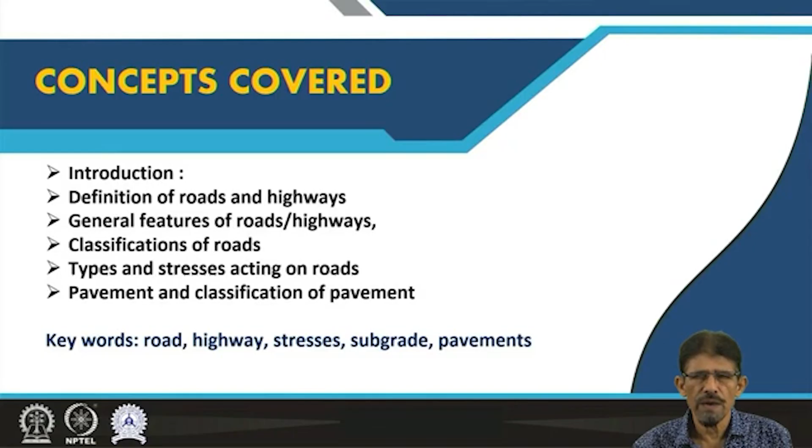In these lectures, we are going to discuss road and highway features, and pavement. We will cover introduction of roads and highways, definition of roads and highways, general features of road and highway, classification of road, pavement, and classification of pavement.

Friends, as you know, the road is a linear alignment utilized for movement of people, transportation of goods and animals. People have been familiar with movement from one point to another since the very beginning, and every country has a good road network. The road network is a symbol of prosperity and progress in civilization concerned to any country. In India also, we have a beautiful network of roads throughout the country.

Roads are very important for economic development because they facilitate transportation of goods, materials and others. Roads are also important for social and cultural exchange and other activities concerned to human progress and civilization.

As far as road is concerned, a road is a simple linear open system and a linear improved surface way to facilitate movement of traffic, vehicles, animals, and transportation of goods and material, etc. Basically, roads can be categorized into three categories: motorized road, non-motorized road, and pedestrian.

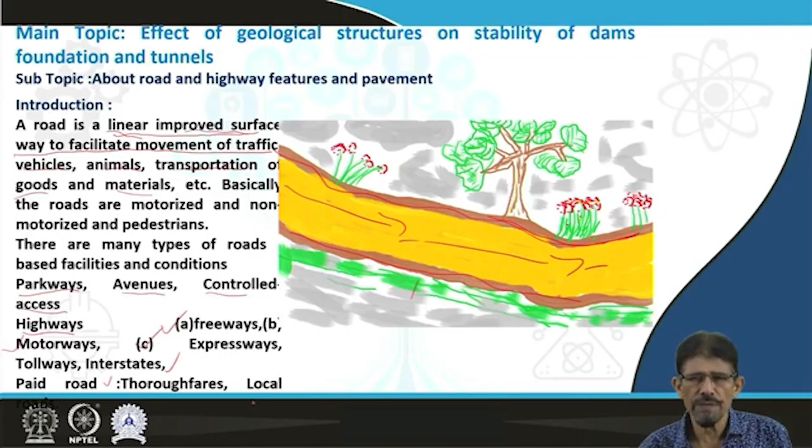As far as highways are concerned, a highway is a road connecting major cities, and the National Highway Authority of India looks after the maintenance, repair, and other aspects of such roads, while the Public Work Department (PWD) is responsible for construction. However, an advanced type of highway is the expressway, also called throughway, parkway, freeway, superhighway or motorway.

An expressway is a major arterial divided highway featuring two or more traffic lanes in each direction, with opposing traffic separated by median strips, elimination of grade crossings, control of entries and exits, and advanced design features.

If we differentiate between highway and expressway, the highway connects major cities and towns, usually having 4 lanes to deliver high speed traffic. But the expressway has limited access and comprises various features like access ramps, lane dividers, etc.

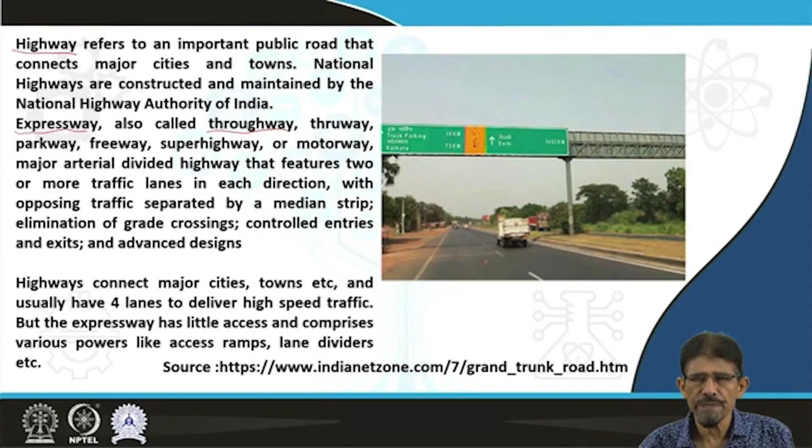You can see a good view of the Grand Trunk Road connecting a long distance from Calcutta to Peshawar, having many lanes and constructed using bitumen as well as concrete.

If we look at the specific definition of road, it may be defined as an alignment used for movement and transportation of materials, vehicles, people, animals, and transportation of goods and others.

As per the Organization for Economic Cooperation and Development, a road is defined as a line of communication or traveled way using a stabilized base, other than rail or airstrip, open to public traffic, primarily for the use of road motor vehicles running on their own wheels. This includes roads present on bridges, in tunnels, in underground cuttings, trenches, supporting structures, junctions, crossings and interchanges, and toll roads, but does not consider a cycle path.

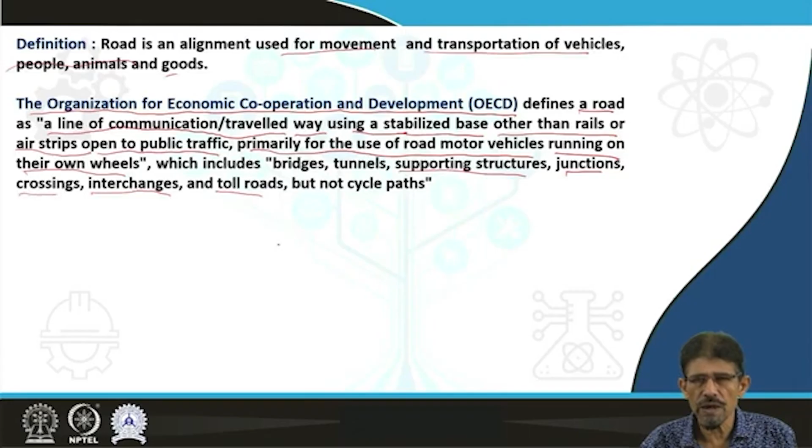For cycle path we are going to allow pedestrian and other sideways for the movement. If we look into the features of road, it can be studied in different parts, as this main road for 2 lanes having expansion of 8 meters.

This is supported by shoulders of maximum 3 meters, but the shoulders should not be less than 2.5 meters as per Indian Roads Congress specification. This 8 meter span road supported by 3 meter shoulders is recognized as total road land.

This whole land is recognized as total road land, and the area supporting this road, total road land, is a road margin on both sides, left and right side. The end of road margin is marked by some stone with a code recognized as boundary stone, and near the cities or town area we have two boundary lines. This whole connecting setback distance is a boundary control zone.

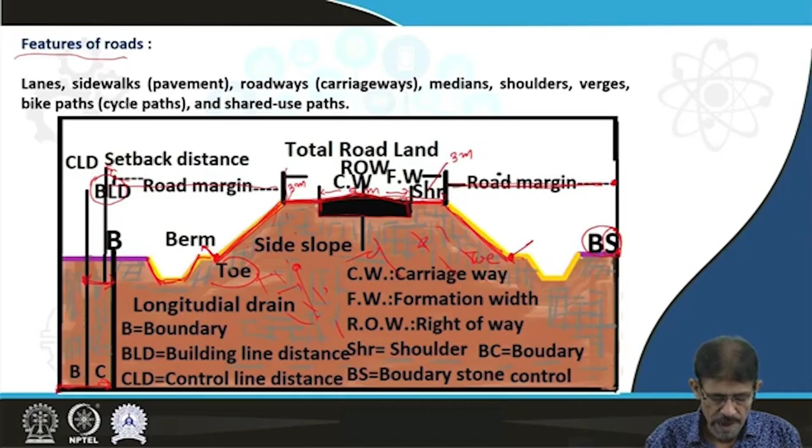Then to properly drain the water available on the road, as well as infiltrated water inside this subgrade in the ground, this drain is going to dewater or drain the water present inside this subgrade to minimize deterioration of the subgrade, and this subgrade shows stable condition when we provide this type of drain.

The top portion of the main road is utilized for the movement of traffic, vehicles and others, so this zone is recognized as carriageway. However, the expansion of road including shoulder is recognized as formation width. This total road land is also recognized as right of way, and shoulders provide additional support to the main road.

The main road is underlain by some layers for support to minimize the impact on subgrade, because the subgrade is the material which bears all the loads coming on the road.

As far as definition is concerned, the carriageway is the width of pavement on which vehicles travel, exposed to sky. The road shoulders are provided along the road edge to serve as an emergency lane for vehicles, as well as to support and protect the main road like our body's shoulder.

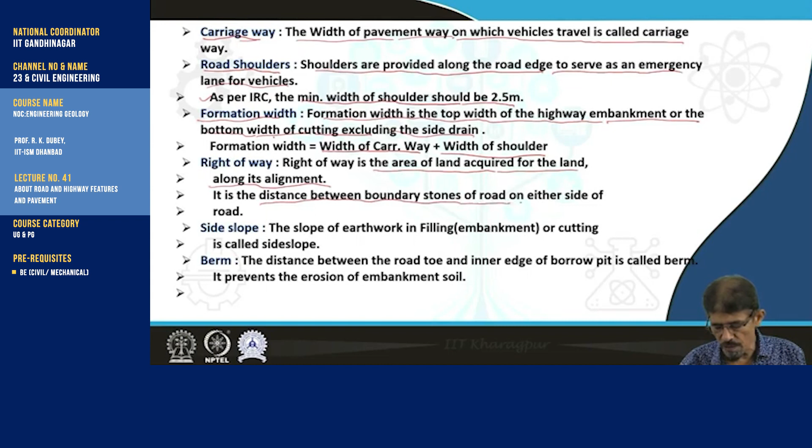However, bottom width is recognized as the expansion of the subgrade up to drain cutting. Right of way is the area of land acquired for the road along its alignment, and it is the distance between the boundary stones of the road on either side.

However, the side slope is the slope of the earthwork, filling, or rock cuts, and the design of side slope is very important because it dictates the stability aspects of the slope. If the material starts sliding, it becomes difficult to stabilize the road, and there may be fractures, subsidence and others.

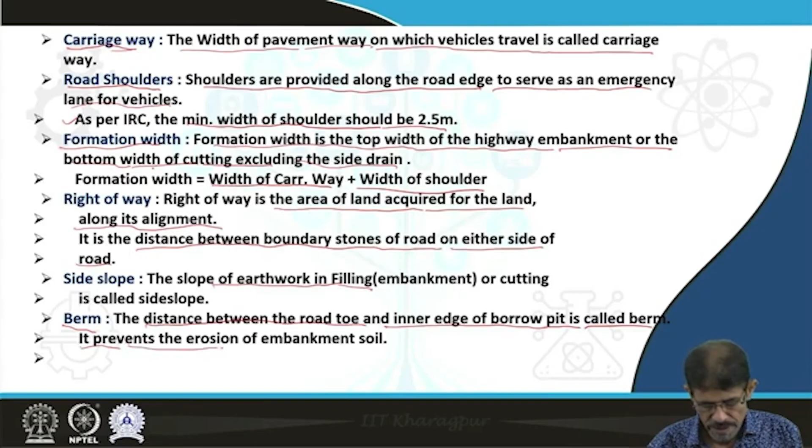Then berm is the distance between the road toe and the inner edge of the borrow pit, and it prevents the erosion of embankment soil.

The side drain is utilized to drain the rainwater, and drains are provided on either side of the road. Sometimes we utilize perforated pipes and others to dewater the main subgrade or materials lying below.

The building line distance is the distance from the center line of the road on either side within which construction of buildings is not permitted.

However, borrow pit is the location from where materials are recovered and used for construction of the road, and the kerb is the boundary between the pavement and shoulders, providing additional support to the main road, and also utilized as a footpath.

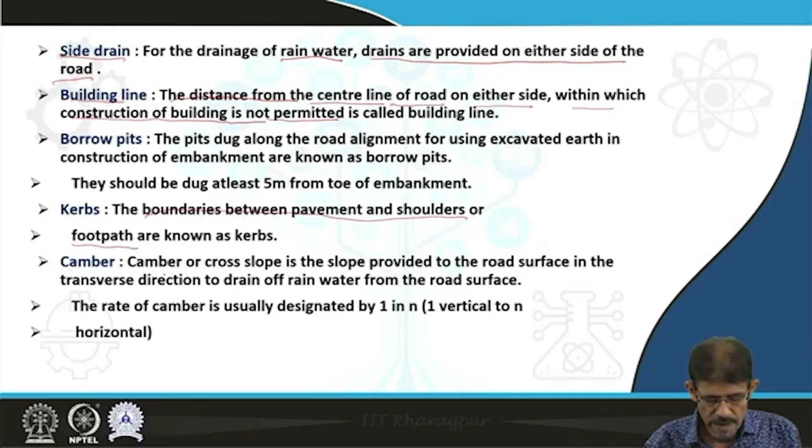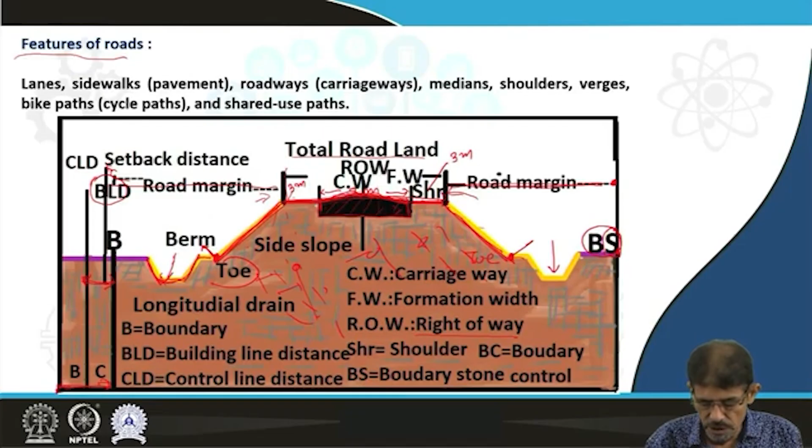Camber or cross slope is the slope provided to the road surface in the transverse direction to drain off rainwater from the road surface, as we have already discussed. This is the camber elevated part. The rate of camber is usually designated as one in N, one vertical and N horizontal.

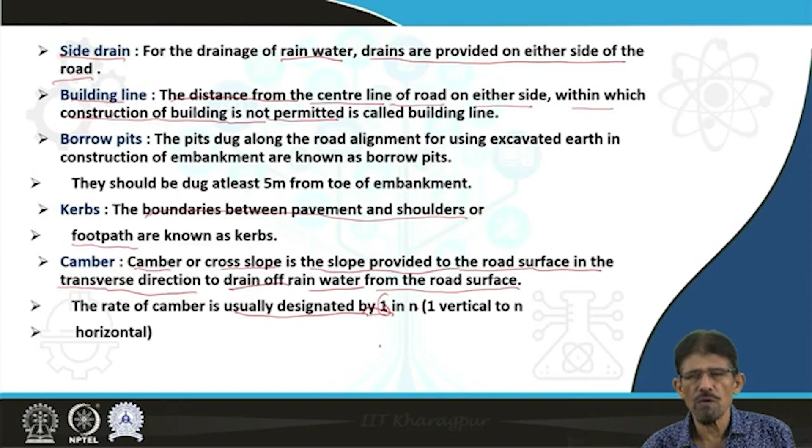As far as material involved is concerned, we are going to divide roads into different categories. Although roads can be divided based on location like plain road, hilly road, or icy road, or on the basis of purpose, or on the basis of payment level like toll road and non-toll road, many classifications can be suggested, but the material based classification is important from our point of view to know about different types of roads based on material involved.

Based on material involved, the road can be categorized into different categories like earth road. The earth road is made up of soil, compacted soil, and generally the earth road is close to the subgrade, utilized for moderate traffic and connection to villages and towns in some remote locations.

However, another type of road is the WBM type, which is water bound macadam. Macadam is simply crushed stone. So this road is constructed by using water along with some crushed rock with the help of rollers and others to make the road comfortable, although this type of road is problematic for the movement of traffic and others.

Then concrete road is made up of concrete, utilized to connect different villages and towns and some specific areas. Then in previous times we had a number of moorum roads.

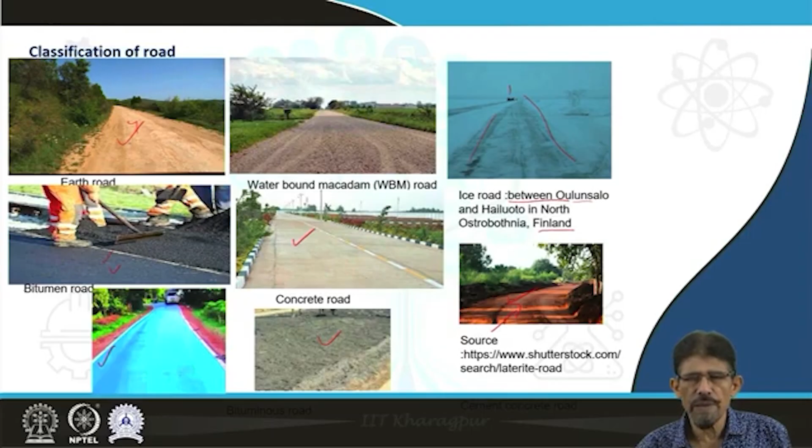Friends, the surface of roads we are observing is always the carriageway, but the carriageway is located on the pavement. Pavement is the main part of the road, and it is the most important part of the highway or road, because this part of the road is going to bear the wear and tear effect of traffic caused by tires of vehicles.

Therefore, this pavement should be a stable and waterproof surface that can withstand the wear and tear resulting from the impact of wheels of vehicles. It is to be so designed that the dead and live loads of automobile movements are safely distributed to the pavement without exceeding its bearing capacity.

This indicates pavement is a very important part of road, and practically this pavement is actually the road. The surface part we utilize for movement and other purposes, but the part lying below the superficial part is recognized as pavement.

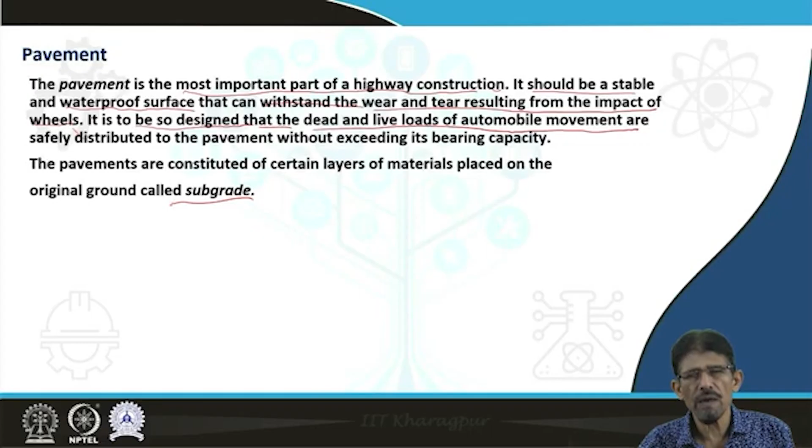The pavements comprise several layers depending on the nature of the pavement, and the pavement directly lies on the original ground, and the original ground is recognized as subgrade. Ultimately, all the load is transferred to the subgrade, therefore selection of subgrade is important.

If we are going to categorize pavement, then we can broadly categorize it into three categories: rigid pavement, semi-rigid pavement, and flexible pavement. Rigid pavement and flexible pavement are based on the concept of modulus of rigidity or shear modulus, which we have already discussed. In view of modulus of rigidity, the pavement can be divided as rigid pavement, flexible pavement, semi-rigid pavement, or semi-flexible pavement.

The rigid pavement, as the name indicates, is made up of rigid material, and that rigid material is concrete. Concrete, friends, you know, is cement plus aggregate plus water. The Portland cement concrete we utilize as the surface course, and such pavements are rigid in nature, therefore called rigid pavement.

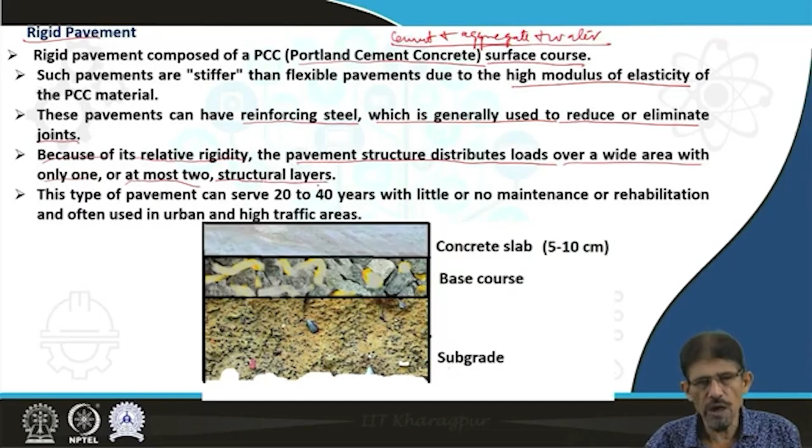Because of its relative rigidity, the pavement structure distributes load over a wide area with only one, or at most two, structural layers. The rigid pavement consists of the original subgrade and the base course, made up of crushed stone and some powdery material, with the base course of sufficient thickness in the range of 15 to 20 centimeters, depending on the nature and characteristics of the subgrade. This base course is overlain by a concrete slab made up of cement, aggregate and water mixture having thickness 5 to 10 centimeters. This type of pavement has a life ranging from 20 to 40 years.

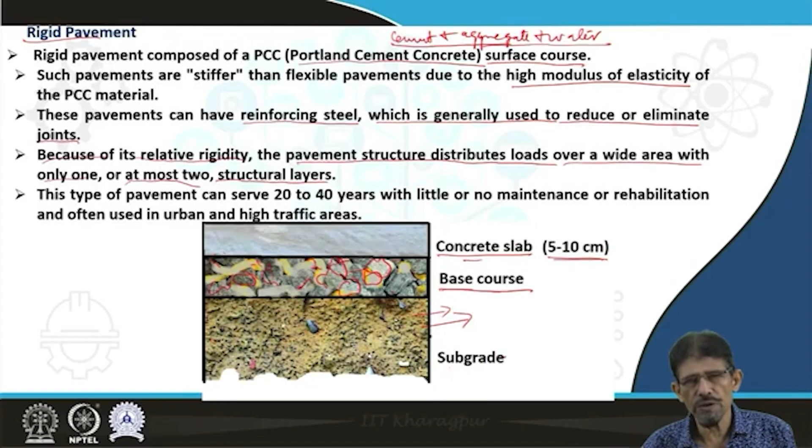Looking at the different layers for material composition: the subgrade is the original ground and acts as a base on which the base course or concrete slab lies. The base course lies over the subgrade and is composed of crushed stone and some sand as fillers. Then the concrete slab, which is the surface course, is the top layer with thickness of 5 to 10 centimeters made up of concrete. The concrete is made of Portland cement, aggregate and water, with aggregate available nearby but of good quality. The life of such pavement, as discussed, is 20 to 40 years.

So what is the benefit of this pavement? It is simple in design, low in cost, has more life of 20 to 40 years, and is able to bear heavy traffic load. Therefore, this type of pavement is generally provided on highways where heavy traffic load is expected, near toll gates or parking areas, and it is resistant to waterlogged areas.

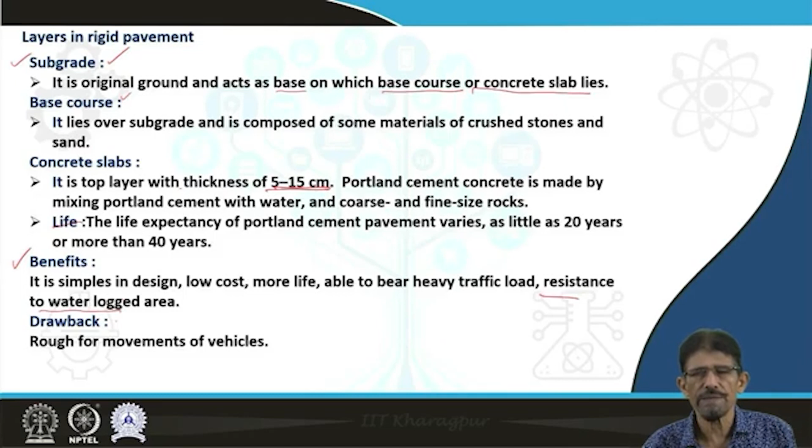And what is the drawback? It is rough for the movement of vehicles and may utilize more fuel.

Semi-rigid pavement, as the name indicates, has a modulus of elasticity of material slightly less in comparison to PCC. The semi-rigid pavement is an alternative solution to overcome the limitations caused by conventional pavements, that is flexible and rigid pavement. Rigid pavement does not provide a smooth surface, whereas flexible pavement provides a smooth surface but has limited life and deterioration due to waterlogging and other factors. So this intermediate type of pavement is recognized as semi-rigid pavement.

The benefits are similar to those observed in rigid pavement: it is simple in design but at more cost than rigid pavement, has moderate life, is able to bear moderate traffic load, and is partially resistant to waterlogged areas, minimizing deterioration of the road. And what is the drawback?

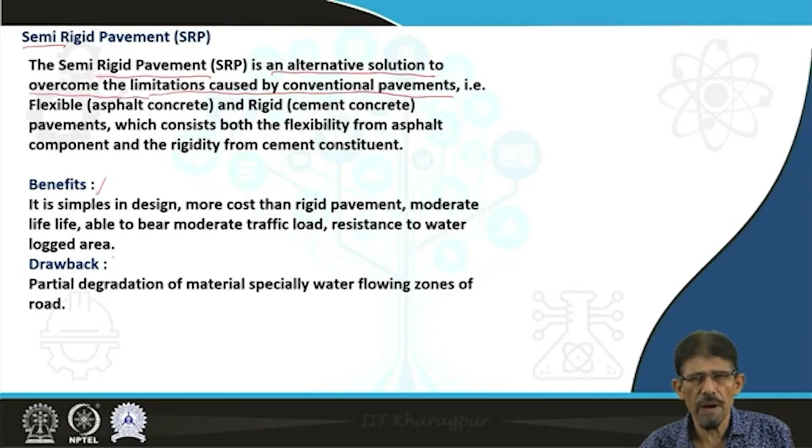It shows partial degradation of material, especially in water-flowing zones of the road, particularly layers made up of bitumen and aggregate.

Flexible pavement, as the name indicates, has a modulus of elasticity that is low, therefore flexible in nature. This type of road is going to adjust with the live and dead load of the vehicles.

You can see a view. This is the topmost surface made up of fine bituminous material, providing a smooth surface for the movement of traffic and vehicles. This bitumen seal is located on the surface course of 5 to 10 centimeters, made up of a mixture of bitumen and aggregate of slightly lower size.

Then the base course, having thickness of 15 to 20 centimeters, is composed of crushed stone along with some sand and others to fill the gaps in a compacted way. Sometimes this base course is supported by a sub-base course, made up of compacted soil material to provide additional support to the flexible pavement, and all these layers lie on the subgrade, which is the original ground.

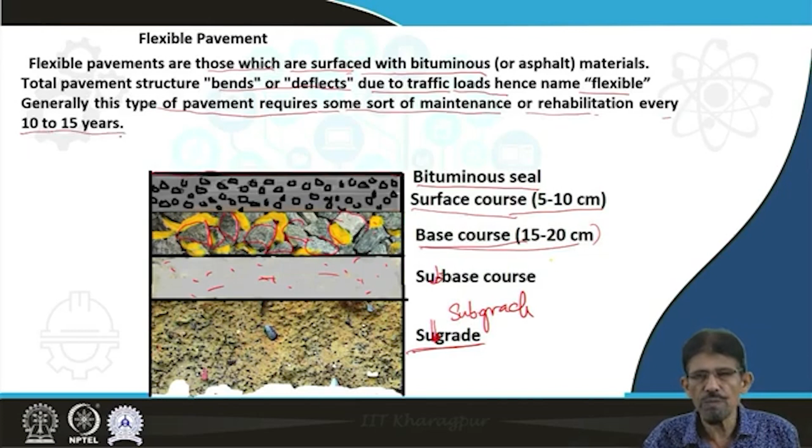This type of pavement generally requires some sort of maintenance or rehabilitation every 10 to 15 years, which is the maximum life of such pavement.

As far as the layers of flexible pavement are concerned: subgrade is the original ground, and the base course is a mixture of crushed rock that lies directly on top of the subgrade or on the sub-base course.

The base layers provide uniform support to the pavement and allow water that penetrates any joints or cracks in the pavement to move quickly to the sub-drain without saturating and softening the subgrade.

To protect the bearing capacity of the subgrade, the sub-base course, which is the layer under the base layer, consists of various sizes of crushed stone along with a combination of soils.

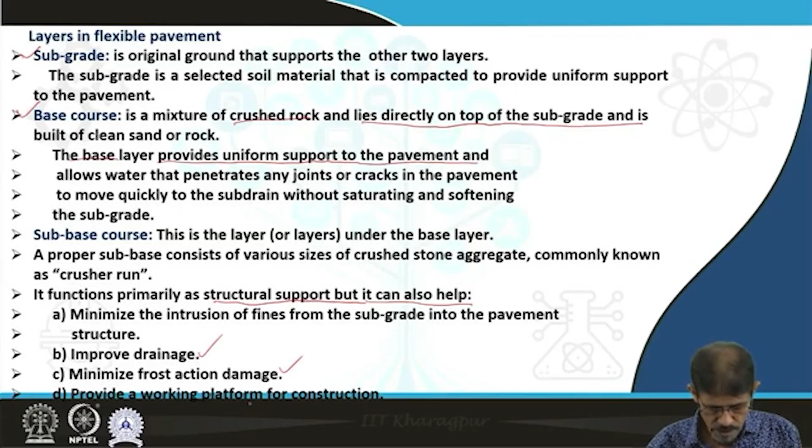It functions primarily as structural support, but it can also help minimize the intrusion of fines from the subgrade to the base course, improve drainage, minimize frost action damage, and provide a working platform for construction of the pavement.

The base course, as already discussed, is made up of crushed stone having a thickness of 15 to 20 centimeters. This base course can be divided into sub-base course, made up of soil and some crushed material for additional support. But the surface course is the top layer which comes in contact with the traffic.

It prevents the entrance of excessive quantities of surface water into the underlying base and subgrade. It is sometimes divided into two layers: the wearing course and the intermediate binder course.

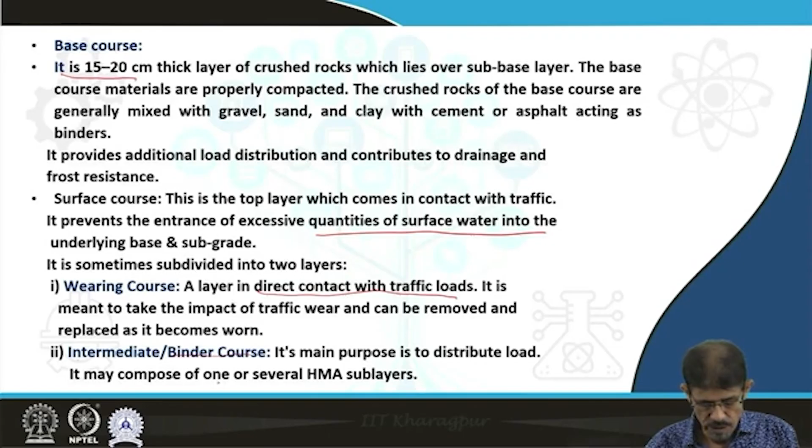The wearing course, as the name indicates, is directly in contact with the traffic load to sustain the wear and tear effect of tires, and the binder course's main purpose is to distribute load to the base course and others. It may be composed of one or several HMA sublayers.

What is HMA? It is hot mix asphalt, a black material used for making pavement. It is a combination of aggregate and asphalt or bitumen binder mixed together at elevated temperature that forms a hard and strong construction material after cooling. It is also called asphalt concrete or asphalt blacktop, or bitumen when well mixed.

It is laid down on the roadway as pavement, so this material is going to show a lot of resistance to the wear and tear effect caused by tires. What is the benefit? It provides a smooth surface for movement of vehicles and results in less fuel consumption.

But what is the drawback? It is unsuitable for waterlogged areas; water flow is dangerous for such type of road. Therefore, in water zones it is generally replaced by concrete roads in highways and elsewhere.

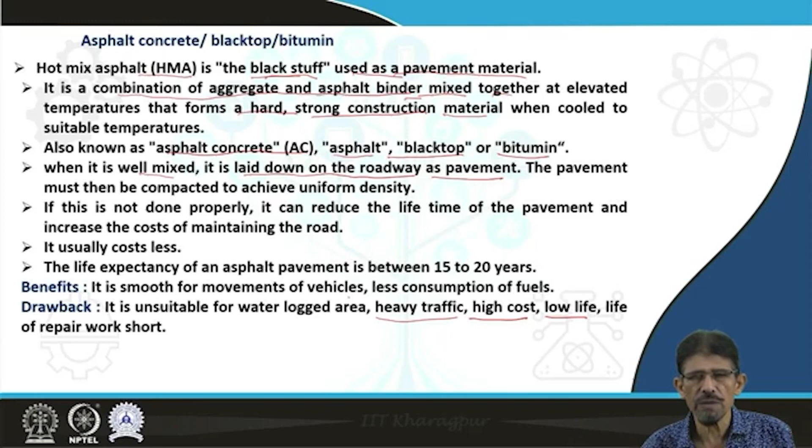This road is unable to bear high dead loads like road sections near toll gates and others. It also has high cost, low life, and short maintenance life, requiring repetitive repair and maintenance.

Friends, in this way we have discussed road, pavement, different features, different types of pavement, and the role of pavement in facilitating traffic movement.

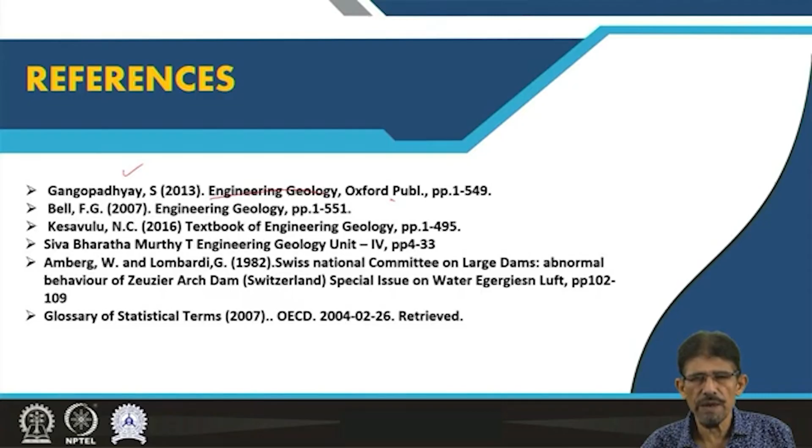We have already discussed in detail about roads and others. The roads or alignments facilitate the movement of traffic and the transportation of goods and animals.

The roads can be divided into various categories based on purpose, area, use, material involved, etc. The pavement of a road is a very important structure because it bears all the loads and is used for transferring stress, and this part resists the wear and tear effect of tires of vehicles.

The pavements can be divided into rigid pavement, semi-rigid pavement, and flexible pavement, and the materials utilized for construction of such pavements are based on cement, aggregate, water, and asphalt, etc.

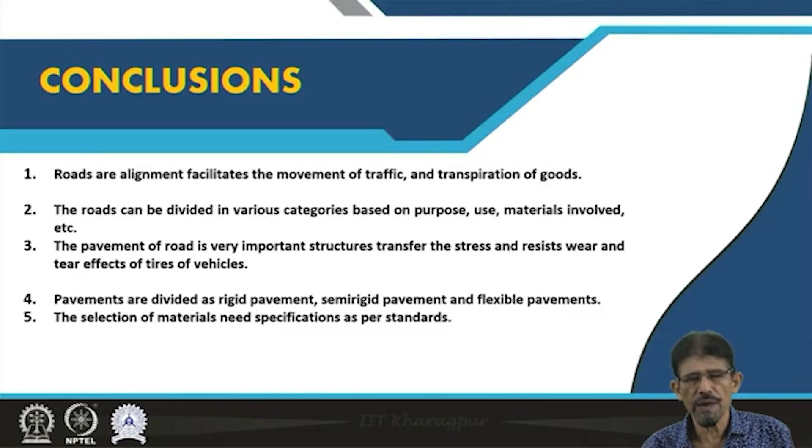Dear friends, in this class we have elaborated on elementary aspects of roads like definition, types of roads or highways, then about pavement, the role of pavement and different features of road, then classification of pavement. Thank you very much for your patience.